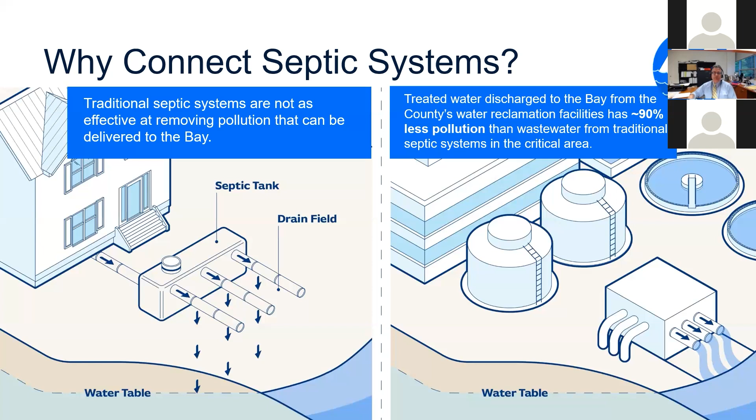So why are we interested in connecting septic systems? The main reason is in the context of nutrient removal, and nitrogen specifically. Our wastewater treatment plants, as I mentioned, have all been upgraded over the last 10 years, and we're getting really high efficiency, high nitrogen removal from those facilities. When we're able to connect a traditional septic system to a public system, we can lower the pollutant loads by about 90%. Can you go to the next slide?

So overall, Anne Arundel County has 40,000 septic systems and 13,000 in the critical area. That's a quarter of the entire total in the state. And septic systems are a significant source of nitrogen for the county waterways, and they do have impacts on local rivers as well. So there's an interest, there's a need there to see if we can get more septic systems to be connected. Can you go to the next slide?

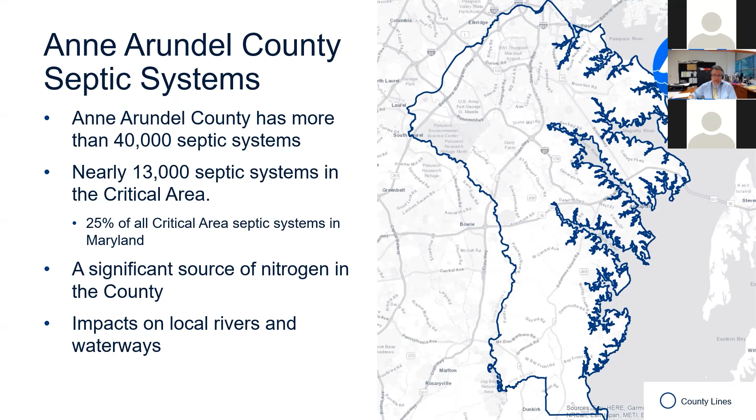And when we see what the benefit there is, and there's a lot of information on this slide, but if you look on the right-hand side of it, the estimated nitrogen load per household from a conventional septic system is the large dark blue bar, about 18.6 pounds per household. If you have a BAT system, that nitrogen load is about half of that, so around 9 pounds per house per year.

A treatment plant that performs at our permit level, which is the required level, is producing about 3 pounds per household. But our treatment plants are actually discharging right now around half of their permitted load. So you can see when a septic system connects to the public sewer, there can be a pretty significant load reduction from that location.

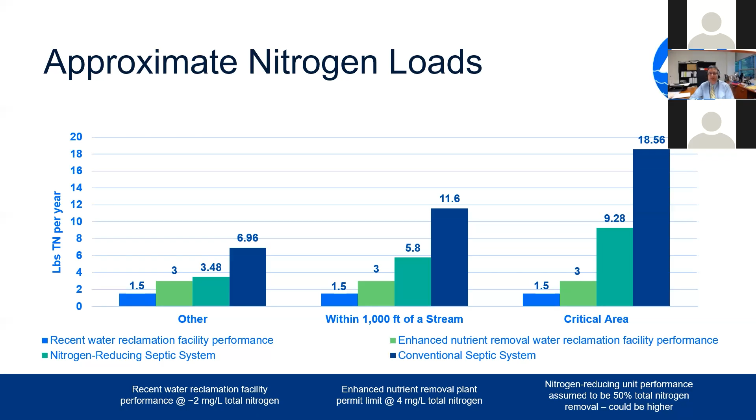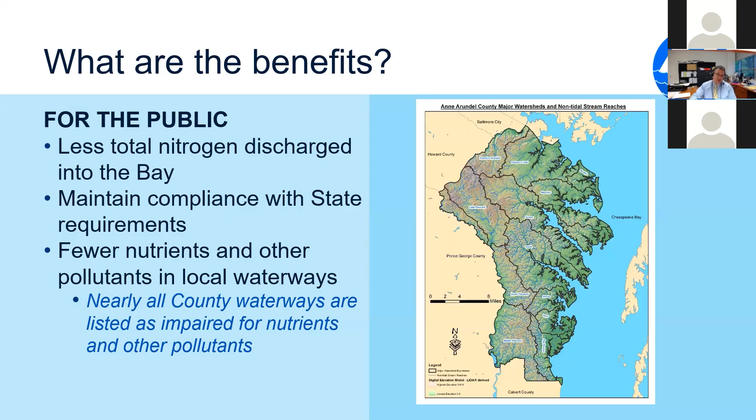So there are some benefits overall to the broader public in septic connections, and that's less total nitrogen discharge to the bay. It helps us maintain compliance with our state nutrient load goals and the Chesapeake Bay TMDL, total maximum daily load. There's also fewer nutrients that would be discharged into the local waterways. So all the county waterways are listed as impaired for nutrients and other impairments. So in addition to the general benefit towards the Chesapeake Bay, there's more direct benefits locally. Can you go to the next slide?

And there are some benefits for the homeowner. These are very site specific and may not apply to everyone's situation. But we're going to mention some of them because these are some potential benefits we're aware of. So in some cases, your septic system can be a restriction on what you can do in terms of building additions at your property. Those typically can be alleviated if you do a public sewer connection. Your yard nearly always has to have room for a drain field, the existing drain field, and then often a future drain field. And so if you switch to a public sewer, that space is available for other uses.

There could also be a positive impact on your home value. If that's something you're interested in learning more about, we would suggest you consult a realtor. These benefits are all very site specific, and every homeowner has to sort of think through how it might benefit them. You can go to the next slide.

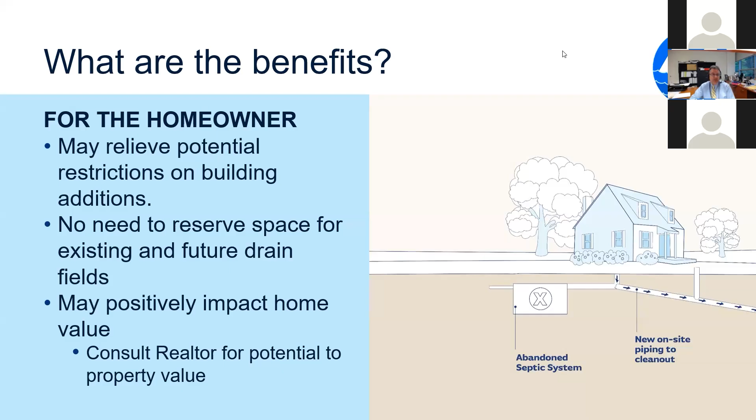In certain cases, if you're on private well water as well as septic systems, obviously, if you connect your septic system to the public sewer, that reduces the chance of contamination from a drain field. As I mentioned, there's improvements to your local waterways by taking those discharges, and essentially they're going to be rerouted down to our treatment plants. And then there are costs that are going to be avoided. So there are some costs associated with owning the septic system. Can you go to the next slide?

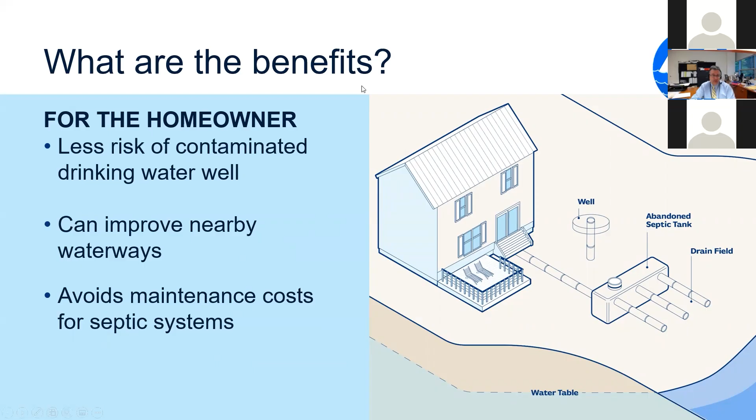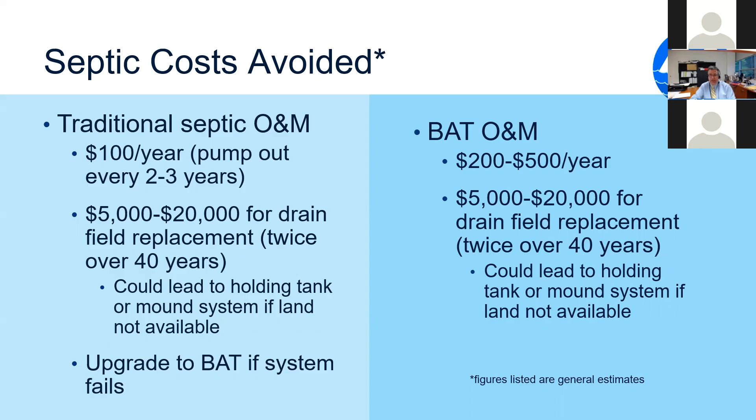And so here we're just showing some general costs that would be avoided if you connected to the public sewer. So that's the pump out cost and a drain field replacement, which could be required over the life of the system. BAT, which is best available technology, that's a nitrogen removal system. They cost a little bit more in terms of the operations and maintenance costs because they're a more complicated system than a traditional septic system.

So we have an overall need that we want to try to improve and protect our waterways and improve the environment. We've developed a modification to the petition process, which we're going to talk about in more depth tonight. And we're going to talk more about how it's funded and how the petition process works. And our overall goal in this program is to connect 6,000 septic systems over the next 30 years, so about 200 systems a year.

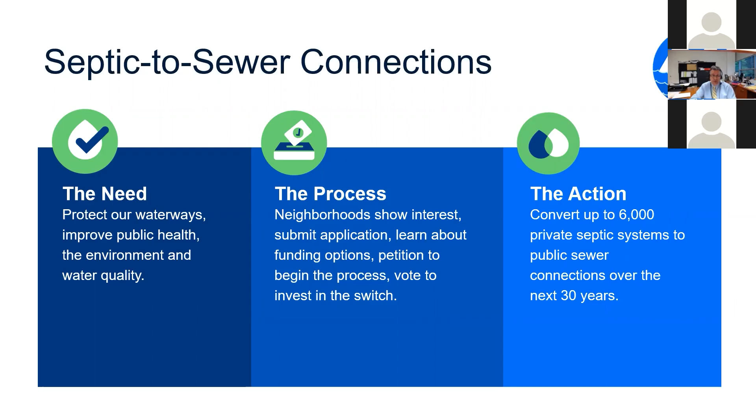So the program history goes back a bit. We started with an initial concept planning effort, which was done in the 2012 to 2016 range, where we were looking at the pollutant sector loads from the Maryland Department of the Environment. We're looking at reducing our septic load by close to 50%. So we looked at, in our situation, how we would connect up to 20,000 septic systems.

After that, we convened a septic task force, which consisted of people from business groups and environmental groups and community groups. And we sort of talked through the challenges of a septic connection program. We looked really for guidance from the task force on policies, prioritization criteria. And what came out of that effort, and we're going to spend more time on tonight, were changes to the petition process to try to make it more affordable.

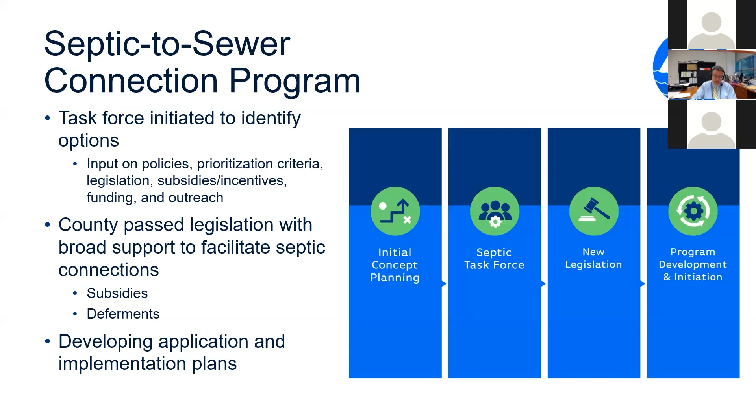So the two key changes we're going to discuss are subsidies. The county's now able to offer subsidies to projects in certain areas, and a partial deferment program, which is also available to locations in eligible areas. We've also developed an application process, and we'll talk about that a little bit more.

So the program, when we talk about an eligible area in the program, that's really what's shown on this map. The green areas are areas in the county that are in the planned service area. The blue areas are the eligible areas for our program. So the key features for being an eligible area is that you're in the critical area, you're in a septic system problem area, or you're in an area that we've defined as an area that we think can be connected, or you're adjacent to one of those areas. So in this case, Poplar Point is eligible because it's in the critical area.

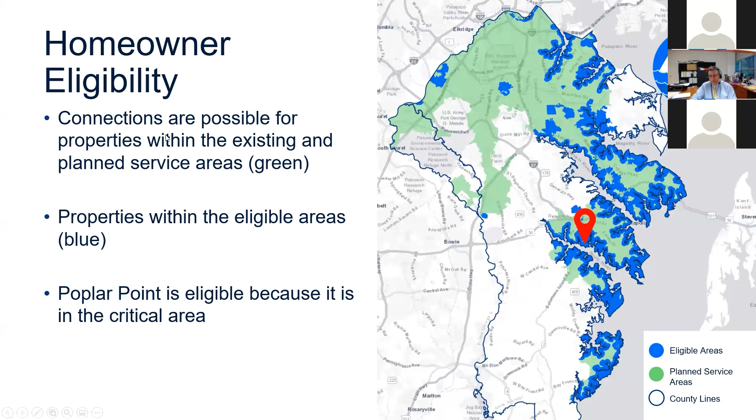So this was a potential area that we developed a while ago when, as I mentioned, we were looking at one point at the possibility of connecting up to 20,000 septic systems. There is no project defined by DPW in the petition process. The project area is actually defined by the residents. We're just showing this area as a potential area to be served. But we do want to emphasize that the specific area gets really defined by the community.

One thing about the petition and how it works with respect to a project area is the project area has to be contiguous from the point of connection to the county system out to the end of the project area. So in this case, if the line was along Poplar Point Road, both sides of Poplar Point Road would need to be in the project area, but not necessarily the side streets coming off of that road. So that's something to think about, if there's interest in this going forward, is how you would define your project area.

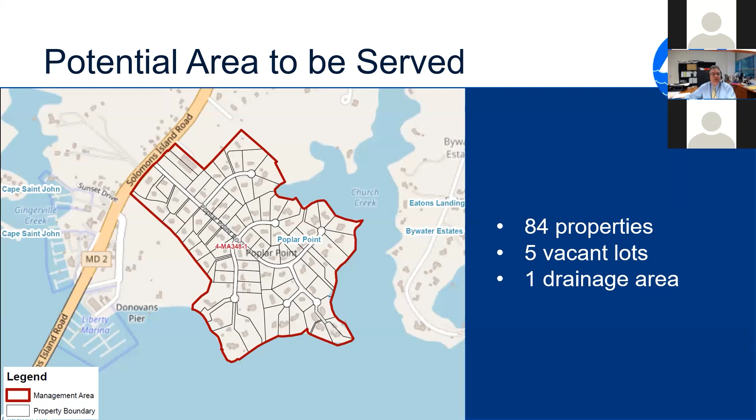In this case, the area, because it kind of slopes down to the water, we're looking at grinder pump systems. We'll show a little bit of a picture of what that looks like later on. And it would go up towards our force main, which goes along Solomons Island Road. So with that, we just wanted to pause and see if there were any questions on the program and some of the background information.

Okay. I'm good. Yeah. Thank you.

Okay, so I'm going to hand it off to Ed Shea with HDR. HDR is a consulting firm that's been helping us with different aspects of the program. He's going to talk a little bit more about the funding and the cost for a potential project. Thank you, George.

So this exhibit shows the different cost elements in this program. The county has developed this new program, which is a change from the previous petition process, in an effort to reduce costs. And there are three basic elements to these costs. So the project cost is the first one. That's to construct the local sewers in the right of way. And that's shown here under the public side of this illustration. Typically that sewer would be in the street.

The on-site costs are what we call the private costs. These are the costs of infrastructure on private property, abandoning the septic tank, new piping to connect to the sewer in the right of way. And the third element is the capital facility connection charge, the CFCC. And that represents the county's investment in the water reclamation facility capacity to treat your wastewater. And that's a fixed charge, typically increases on an annual basis.

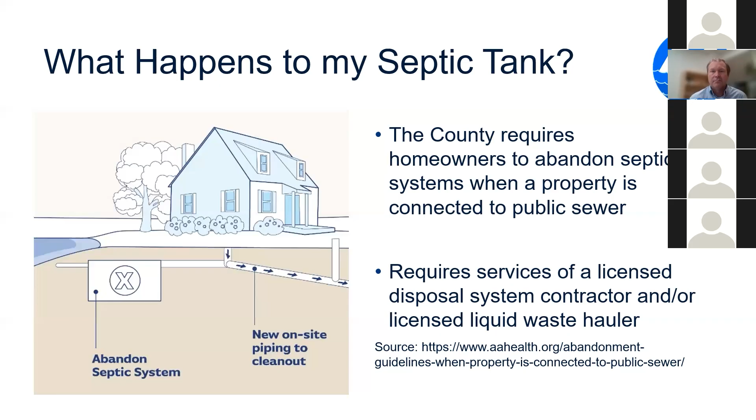I'm going to ask George to comment on the cost of the grinder pump. So the grinder pump cost would be included in the assessment, and we'll talk more about that. Can you go back a couple slides. So the grinder pump would essentially be serving the same purpose as the sewer clean out on this diagram. So it's going to be the point near the edge of the public right of way that's going to connect to the public main in the street. And we would include the cost for the grinder pump in the assessment cost. What the homeowner would have to pay is all the costs from the surrounding area around the house to get out to where the grinder pump is located.

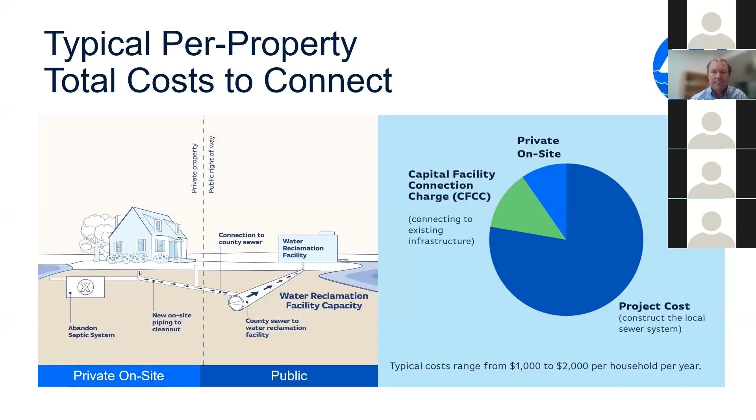Let's see if we got a better diagram of that. Rakia, do you want to show slide 48, please? 48 has the image of the typical grinder pump system. Next one. Yeah. The one after this shows the whole layout.

Yeah, there it is. So this was actually somewhat similar to what it would look like in your particular neighborhood. In the front of each house, there would be a grinder pump, and there would be a smaller, what they call a small diameter force main, and then it would connect out to a line in the street. Now, in our case, there's actually a force main out on Route 2 there. So that part of this diagram isn't right, but it would roughly look along those lines. Okay. Okay, thank you. Sure.

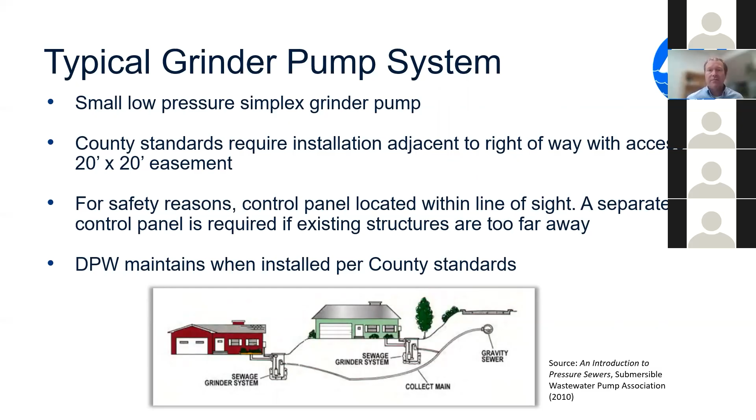Homes in your neighborhood tend to be further back from the street, so that plays a factor. If a home is set back further from the street, there's more piping that has to be installed to connect to the public sewer. So that would drive it up as well. So when we say private side cost, this is what you could expect.

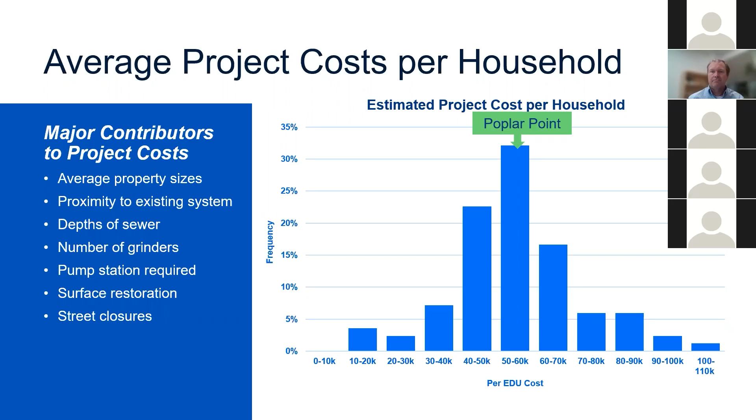Ed, could you just go back one slide? So we just wanted to follow up. So this was 50 to 60,000 per household. Ed, I think you said per year. It's not; this was what we would think the public side cost would be for the construction. I just wanted to clear that up.

Yeah, so the label here is per EDU. We're talking about equivalent dwelling unit, or basically per home. So we'll pause there if you have any questions on the cost so far.

So then if it's 50 or 60 cost per household for the project costs, and then it'd be 4 to 8 to connect to the street. So you're talking about from $54,000 to $68,000 for each homeowner to connect to sewage, basically.

Those are the elements of the cost. There's also the capital facility connection charge. Currently, that's about 8,000, I believe, 9,000. We're going to go into this in further detail in the next part of the slides. Okay. But these are the costs that roll up into the annual assessment. But yes, you've got the gist of it. Okay. Thank you.

So the county's looking at different funding sources, and most importantly, with this new program, the county's been able to subsidize up to 25% of the project cost, what we're calling the total project cost for the public sewer component of it. There's also state funding through the Bay Restoration Fund, and that can be applied to the private side costs, as well as the CFCC.

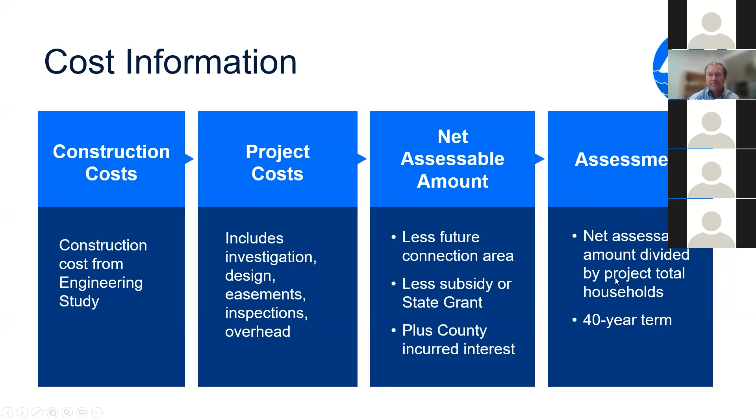And that would subtract from the project costs the subsidy that's available from the county, as well as the state's BRF grant. And the interest to finance that cost over a 40-year term is also included in that net assessable amount. And that is what turns into your annual assessment that would be paid in equal amounts over a 40-year period. So going back to the question earlier, that's why it's not simply adding up the costs, because once you finance it, you include the interest, and then it gets divided over the 40 years.

So again, what I was explaining earlier, we're currently assuming 5,000 of the 20,000 BRF grant would be applied to lower the annual assessment. The other 15,000 is used to cover upfront costs, which could include the private on-site costs as well as the CFCC. For households up to 300,000, they can receive up to the 25% county subsidy. And then for households greater than 300,000, it's a half subsidy, 12.5%.

Everyone has the option to defer up to 50% of the costs. And we're going to go into the deferment in a little bit more detail with an example in a few slides.

So whatever the annual assessment amount is, you could choose to defer up to 50% of that amount payable at the end of the 40-year term or upon property transfer. For vacant lots, the homeowner does not get the option for the subsidy, the deferment, and no BRF funding.

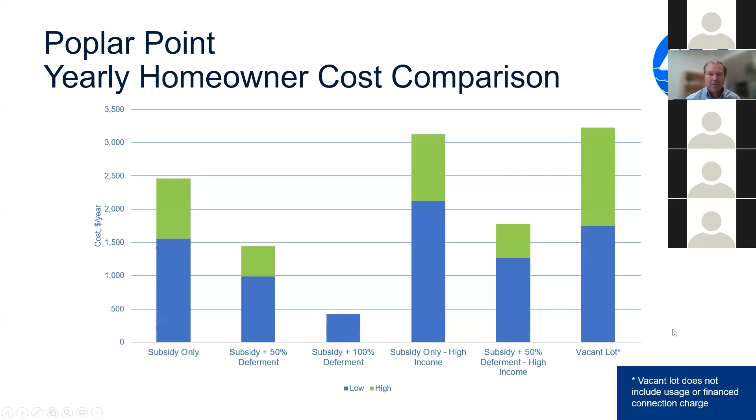So just a summary of what these assessment options are. For the private side costs, the homeowner can access the Bay Restoration Fund grants, and those are available at connection right away. The capital facility charge also can use the Bay Restoration Fund grants, or the homeowner can choose to finance the CFCC over 40 years. And then the annual assessment is also financed over 40 years. Homeowner has an option to defer up to 50%.

And this is paid in a separate bill. It's separate from your tax bill. It's separate from the sewer usage bill. Every January, a homeowner would receive a separate assessment bill for the sewer connection. I'm going to turn it over to Ron Briggerman, who's going to walk through a couple of examples on how the deferred payment option works.

Before we go to that next section, I do want to address this question here in the chat. And the question is, how are the grinder pumps powered? So the grinder pumps are powered by electricity. So there's a control panel that often can be installed near the house, or on the house. The grinder pump itself needs to be near the roadway, so that if, say, the house is really far from the road, we would have a control panel installed near the grinder pump.

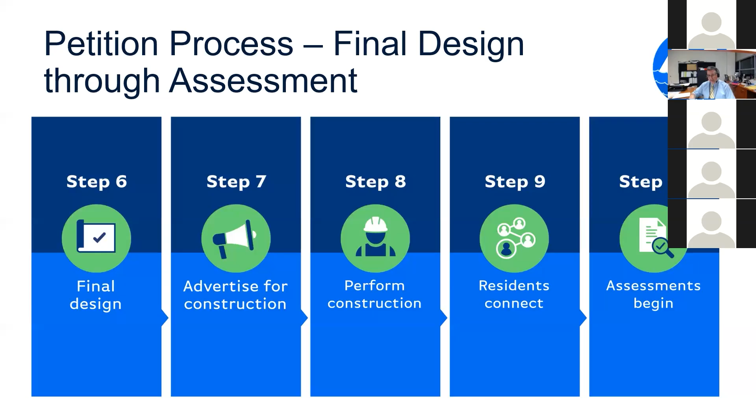So once all the work is done and the county's finished paying the contractor and the designers and everybody, then we can finalize the project costs. Go to the next slide. So I don't know if there's any questions on that. Sometimes neighborhoods have been through the petition process and sometimes they haven't. So, if there's any questions about the application or the petition process, we'll talk a little bit more about the applications in a second.

So, okay. So we've set up a community page on the Our Water website, and this has been set up to help in terms of providing information to other people who maybe couldn't make it tonight. So if you go to the Our Water webpage, first of all, the easiest way to get to the community webpage is to use the bit.ly link that's right there.

But if you go to the Our Water webpage and you go to the septic to sewer portion, you type in your address, it should pop up that you're in an eligible area, and then there'll be a box that says go to your community webpage. So what we're putting on there is the slides from tonight's presentation. Within a week or so, we'll have a recording of tonight's meeting on there. And we'll post some other information that's related to the program.

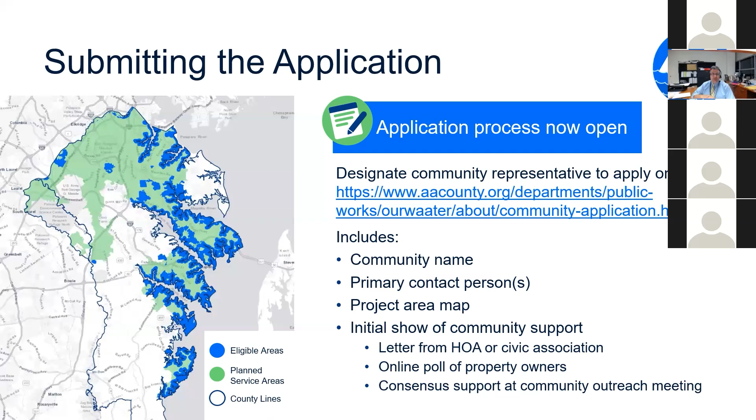So you can go to the next slide. George? Yes. Hi, quick question. The county subsidy of 25 or 12.5%. So if we ranked below another neighborhood, we might get a lower percentage subsidy, or we might not get the subsidy? You would not get the subsidy. Okay. And we would tell you that when we came back for our follow-up.